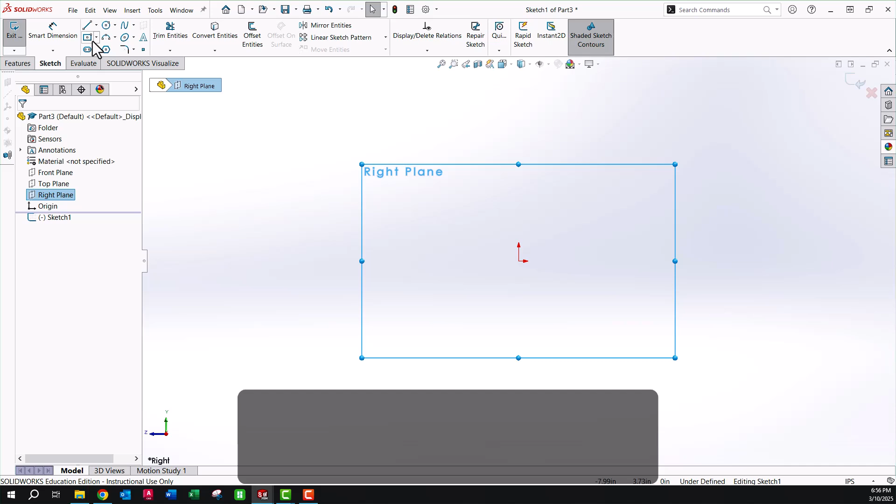This is the intake. So we're going to start our first sketch on the right plane this time. Just going to draw this out a little bit. Height of this is 1.5. Overall width is 1.75.

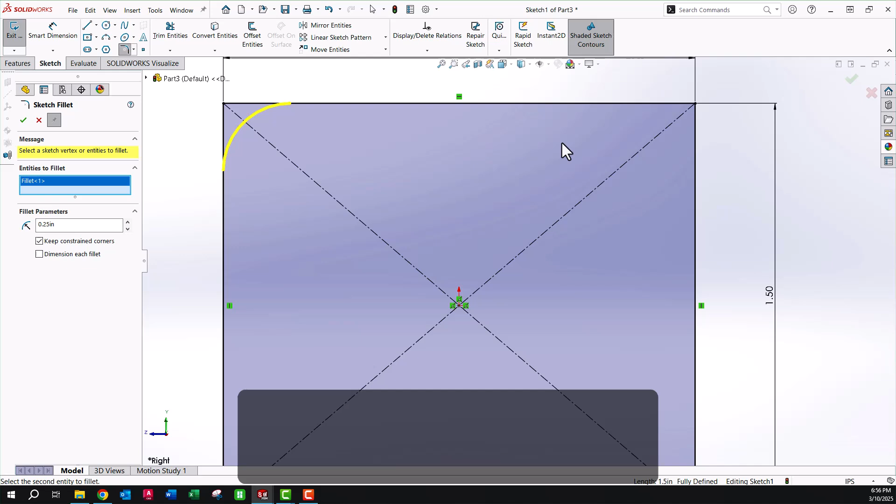And let's add these right into this sketch. 0.25 fillets on all corners. These up a little bit. Okay. We are going to mirror some stuff, so I'm going to add some center lines, so we only have to do this once.

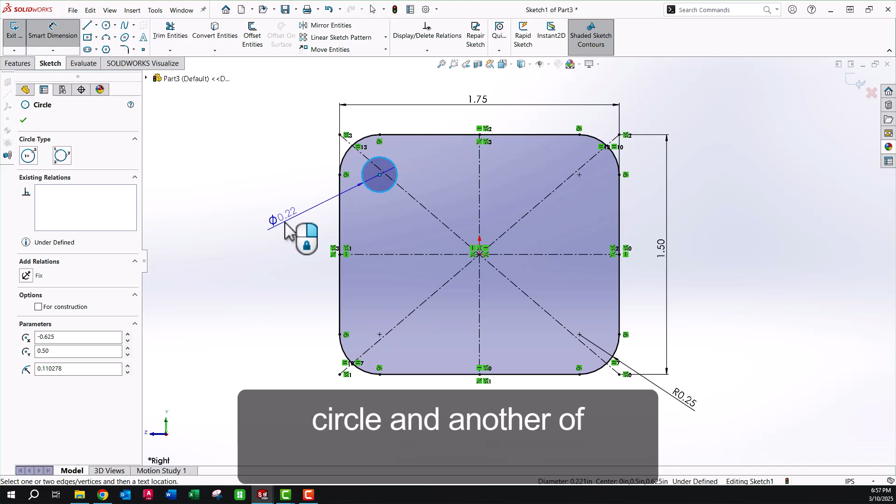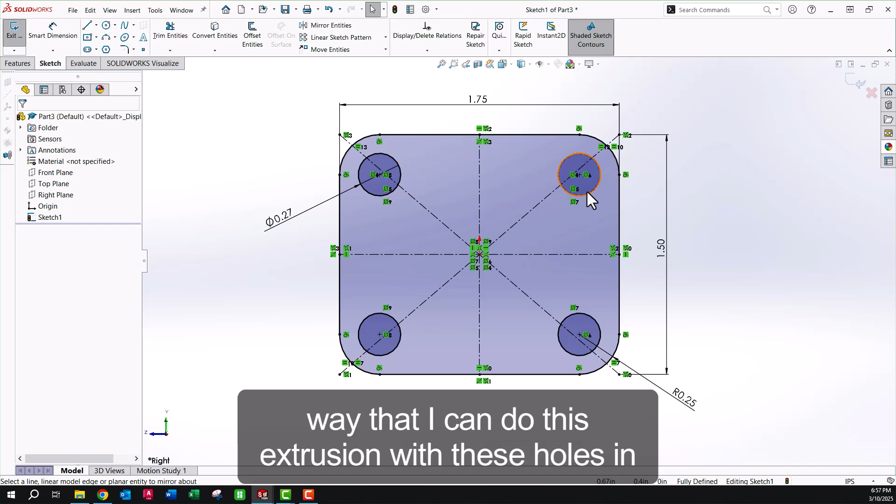Right on that center mark, I'm going to put in a circle with a diameter of 0.266. And now I'm going to mirror once, twice. Okay, and the only way that I can do this extrusion with these holes in here is because they happen to go all the way through. If they had only a certain depth, then I would do that in another sketch and do a cut.

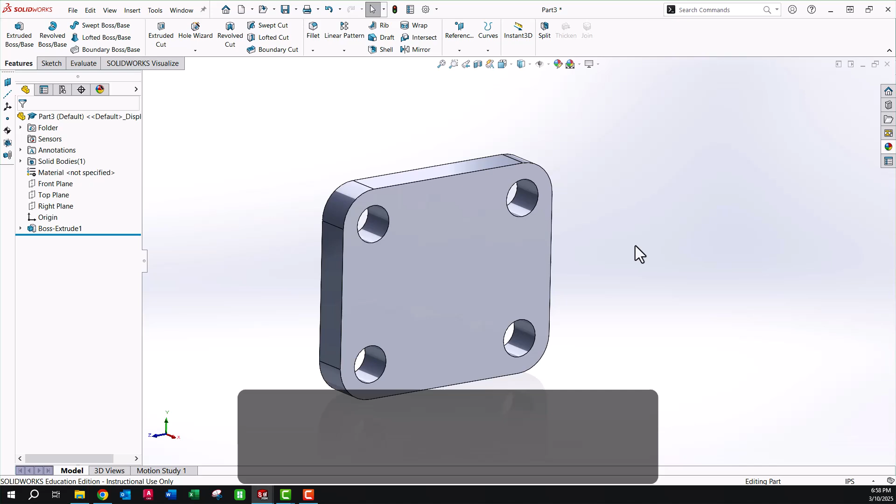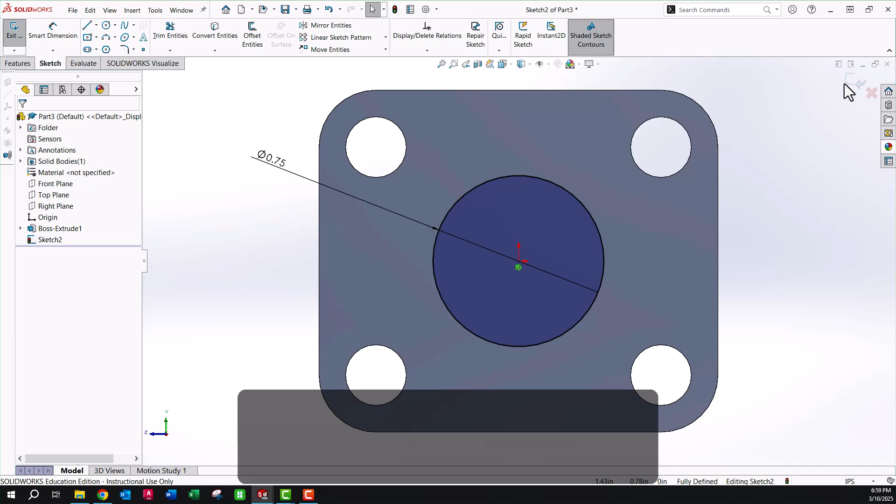Extrude this up. Thickness of this is 0.25. It does have a hole going all the way through. I'm going to do that in a separate sketch, just right here, so I might use that sketch by itself later. This is going to be 0.75. We can do a cut all the way through on this one.

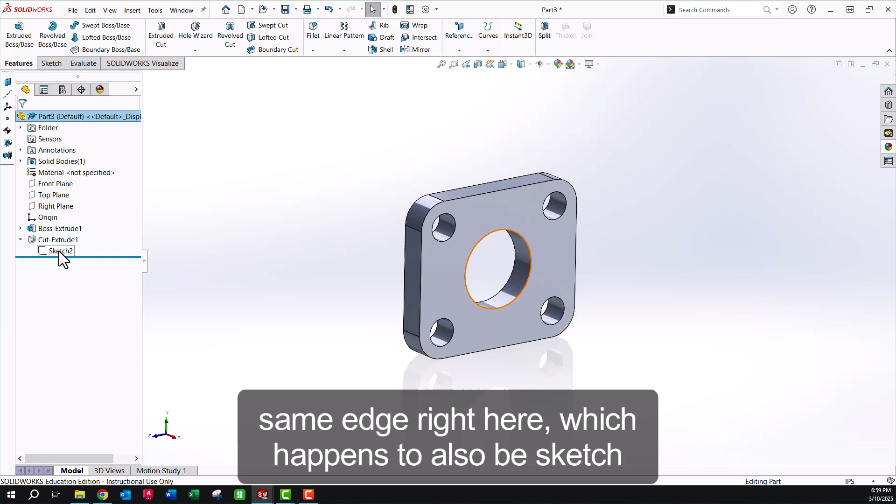Now we have to add our profile and our sweep itself. So the profile is actually going to be this same edge right here, which happens to also be the sketch that we just did that cut extrude. But we need to make our path. So we're going to go to our front plane, and we're going to do some lines here.

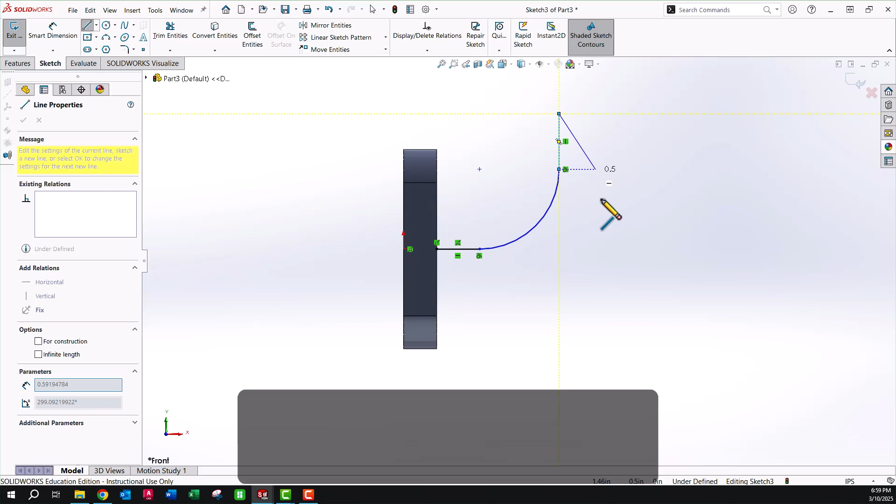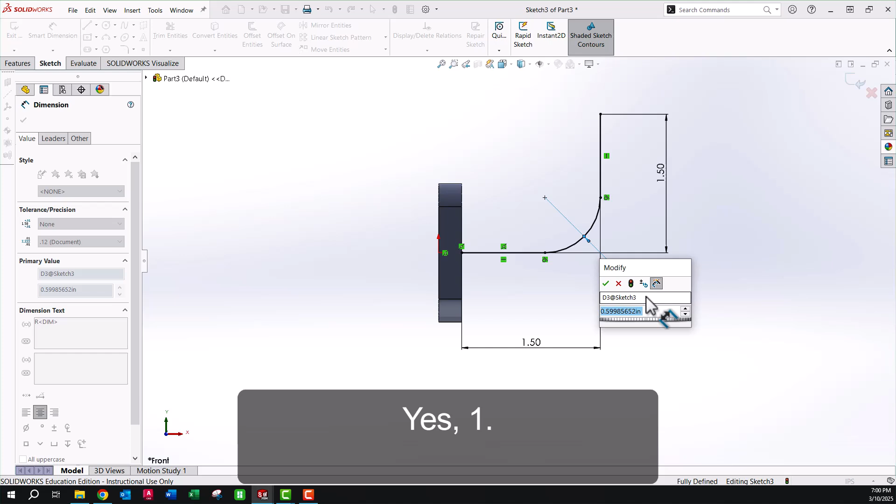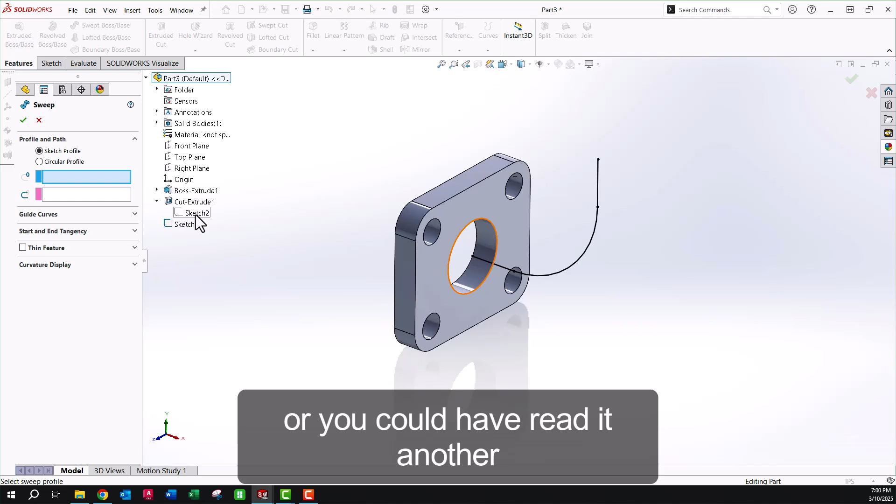Overall width 1.5. Overall height is the same, 1.5. Radius is 1. Now we are going to do our sweep. And because we used that sketch here, we can use this again, or you could have created another one. Path is here.

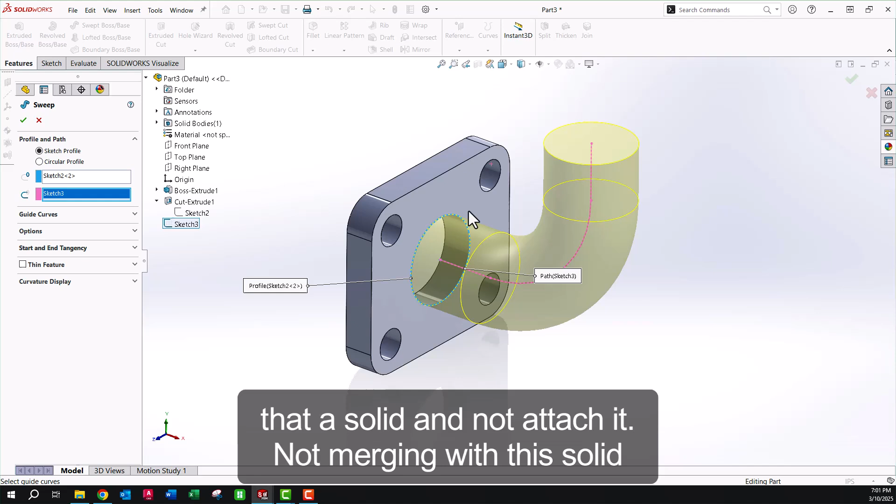And what we're going to do is we're going to add a thin feature to that. What we could do to make that a pipe is we could extrude, or we could use the sweep command to make that a solid and not merge it with this solid and then shell it. Or we can use the thin feature here, and you can see how you can change the direction. We want it shelled going out. We want the hollow to be where our profile is and then add the material on the outside.

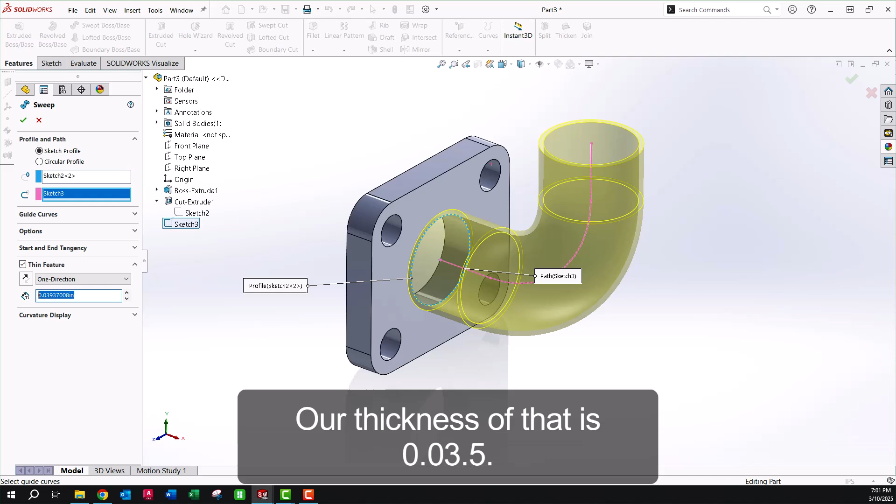Our thickness of that is 0.035. And if you did it a different way, make sure that you have one body at this point. So if you have two, you need to make sure that you merge or you combine those two bodies.

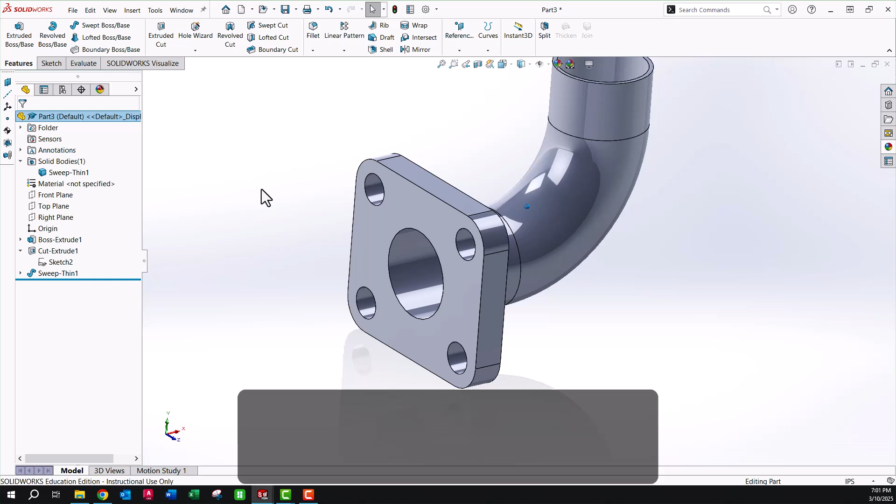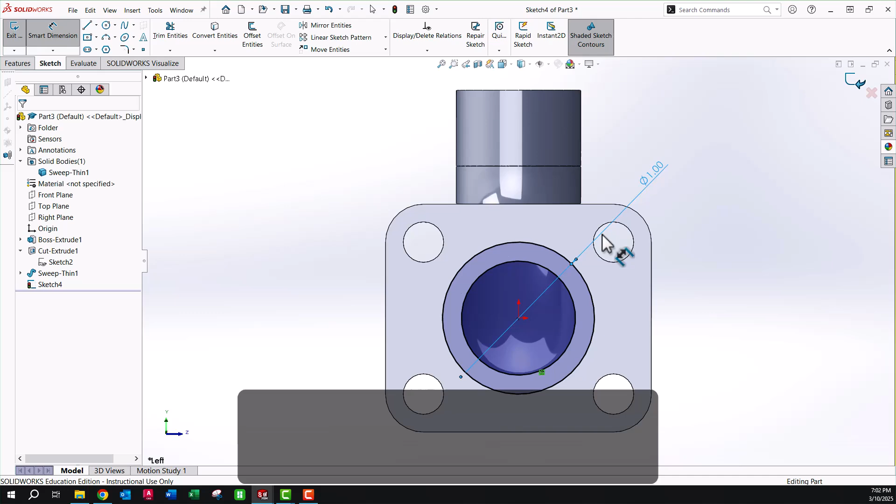Let's do a sketch here. I'm going to take this edge, convert entities, and it gives me this dimension. Yes, it does, of 1. So I'm just going to do a sketch here, 1. I'm going to extrude that out a distance of 0.115. Merge those results.

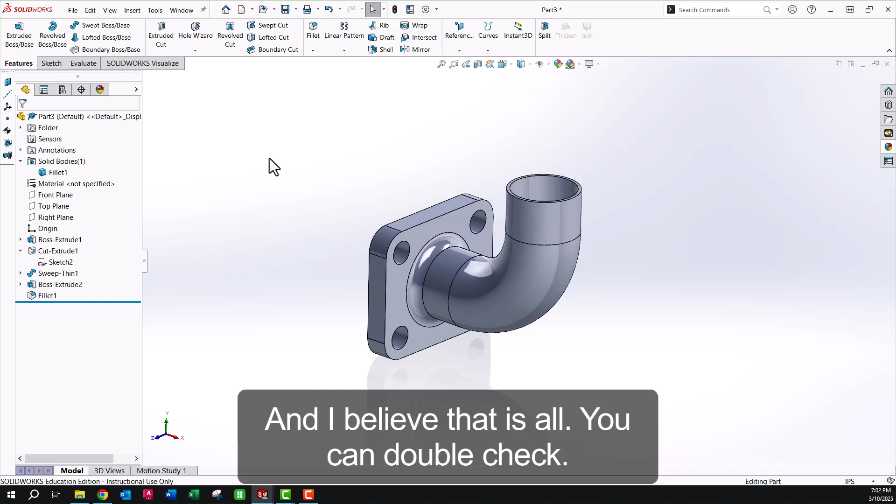And we're going to add a fillet. Radius of 0.125 right here. And I believe that is all. You can double check. Looks good. Changing our material to chrome stainless steel. And there's our finished intake.